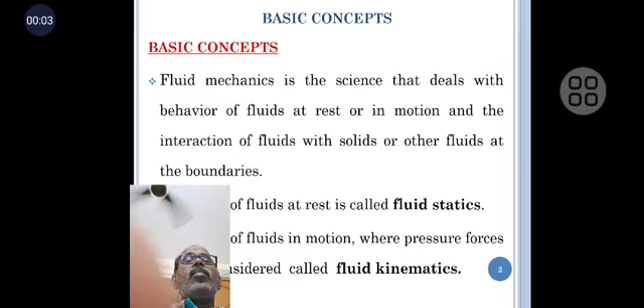Fluid mechanics. The basic concept of fluid mechanics: it is a science that deals with the behavior of fluids at rest or in motion, and the interaction of fluids with solids or other fluids at the boundary. So fluid mechanics deals with the fluid at rest as well as in motion.

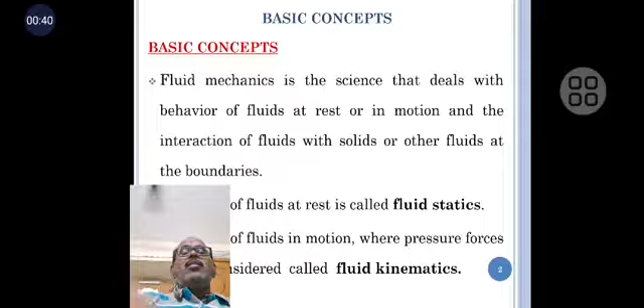The study of fluid at rest is called fluid statics. The study of fluid in motion without considering the pressure forces is called fluid kinematics. That is, we only discuss velocity and acceleration details. And the study of fluid in motion, if the pressure forces are also considered, is called fluid dynamics. In fluid dynamics, we analyze based on Newton's second law of motion.

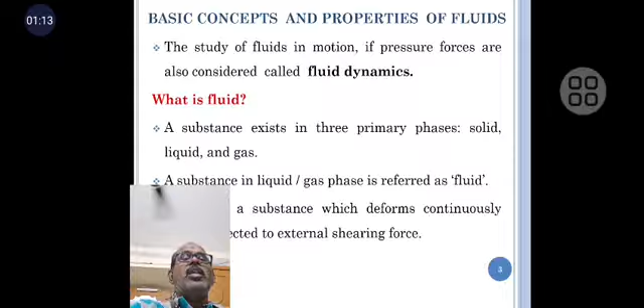What is fluid? A substance exists in three primary phases: solid, liquid, and gas. A substance in the liquid or gas phase is referred to as a fluid: a substance which deforms continuously due to external shear forces. Distinguishing between solid and fluid: in a solid, the attractive forces between the molecules are larger, therefore they are more closely packed. But in a fluid, the attractive forces between the molecules are smaller, therefore they are more loosely packed.

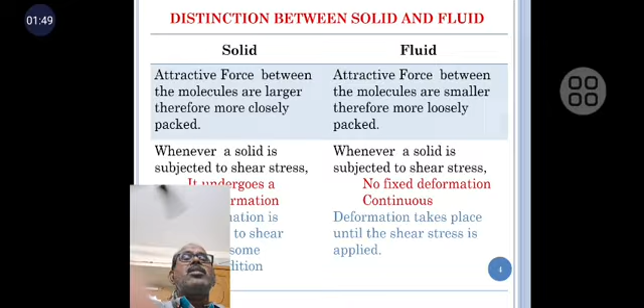Whenever a solid is subjected to shear force, it undergoes deformation, and the deformation is permanent under this condition. But whenever the fluid is subjected to shear stress, there is no fixed deformation; it is continuous. The deformation takes place as long as shear stress is applied. Next, we will discuss that.

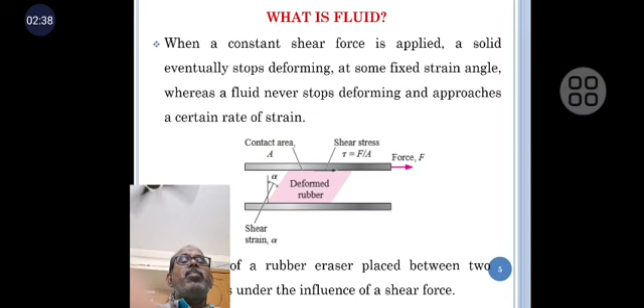When a constant shear force is applied, a solid eventually stops deforming at some fixed strain angle, whereas a fluid never stops deforming and approaches a certain rate of strain. The diagram shows a deformed rubber eraser placed between two plates under the influence of shear forces.

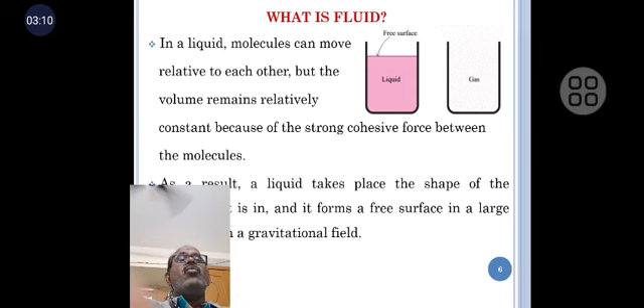In a liquid, molecules can move relative to each other, but the volume remains relatively constant because of the strong cohesive forces between the molecules. As a result, the liquid takes the shape of its container, and it forms a free surface in a large container due to gravitational forces.

In a gas, on the other hand, the gas expands until it encounters the walls of the container and fills the entire available space. This is because the gas molecules are widely spread out and the cohesive force between them is very small. Gas cannot form a free surface. That is the distinct difference between liquid and gas.

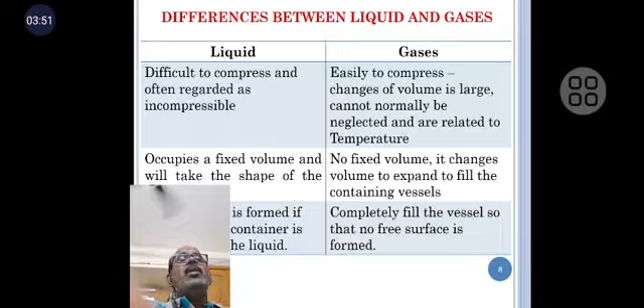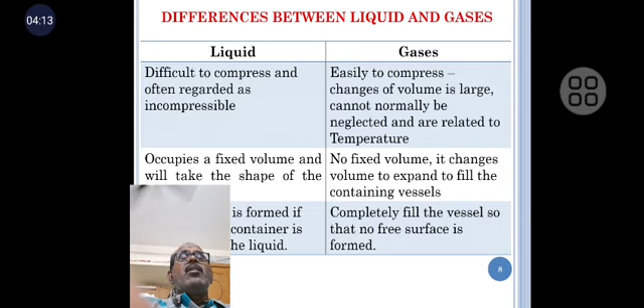A liquid is difficult to compress and is often regarded as incompressible. Liquids are incompressible, but gases are compressible because they are easy to compress; the change in volume is larger, cannot normally be neglected, and is related to temperature. A liquid occupies a fixed volume and takes the shape of the container, but a gas has no fixed volume. It expands to fill the containing vessel completely, with no free surface formed.

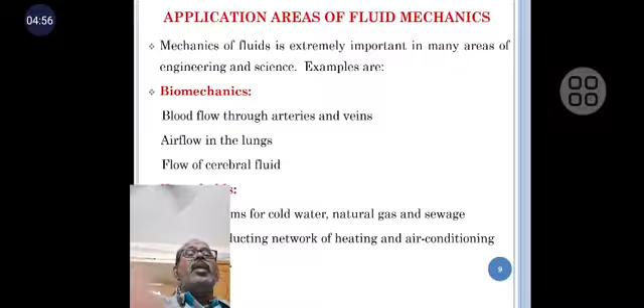Next, the application areas of fluid mechanics. The mechanics of fluids is extremely important in many areas of engineering and science. Examples: biomechanics, blood flow through arteries and veins, airflow in the lungs; pipelines for cold water, natural gas and sewage systems, and ducting networks for heating and air conditioning.

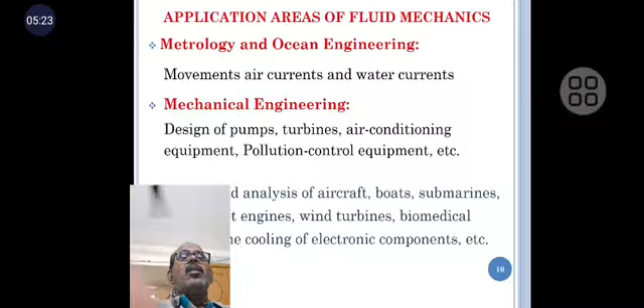Next, meteorology and ocean engineering: the movement of air currents and water currents. In the mechanical field, the design of pumps, turbines, air conditioning equipment and pollution control equipment. Nowadays, analysis of aircraft, boats, submarines and wind turbines, biomedical systems, and cooling of electronic components. These are applications of fluid mechanics.

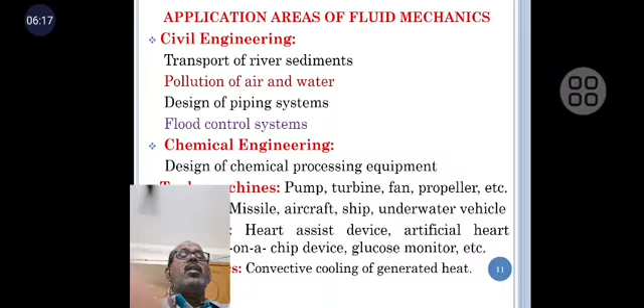Aerodynamics: missiles, aircraft, ships, underwater vehicles. Biomedical systems: heart assist devices, artificial hearts and glucose monitoring systems. These are the application areas of fluid mechanics. The number of fluid engineering applications is enormous: breathing, swimming, airplanes and windmills, engines, blood flow, fans, turbines, to name a few.